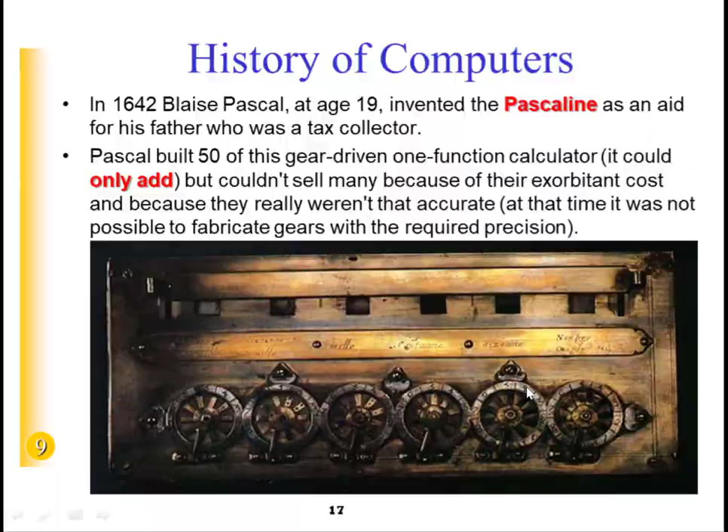Pascaline, or Pascal's calculator, was the world's first mechanical calculator, invented by French mathematician and philosopher Blaise Pascal in

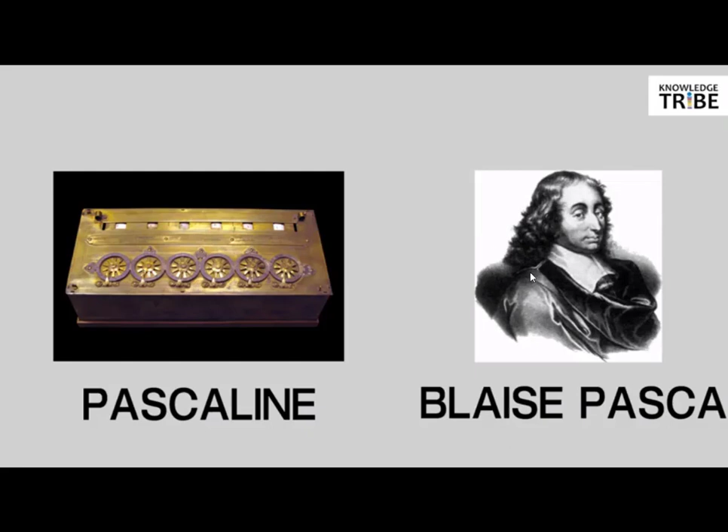1642. There are input dials and output windows on the top of the Pascaline. Inside each of the dials, we can see a small drum with digits 0 to 9 written on it.

Each drum has two rows of numbers, one below the other. Every time an addition takes place, the top row of the output windows is covered with a horizontal slat.

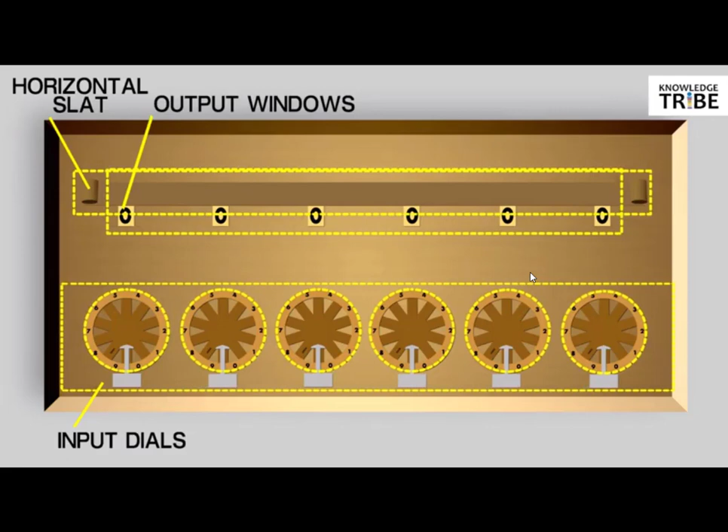Through the bottom windows, you can see the results of the addition. The top row shows you nines' complement numbers, which helps you in doing subtraction.

Each input dial is divided into 10 parts using spokes. In order to enter a digit you need, put a stylus into the middle of the appropriate spoke.

You need to rotate the spoke clockwise till it reaches the metal indicator or fixed stop located at the bottom of the dial.

Entering numbers consecutively in the dials displays their sum on the output windows. For example, if we want to add 38 plus 42, the first thing to do is enter the numbers 3

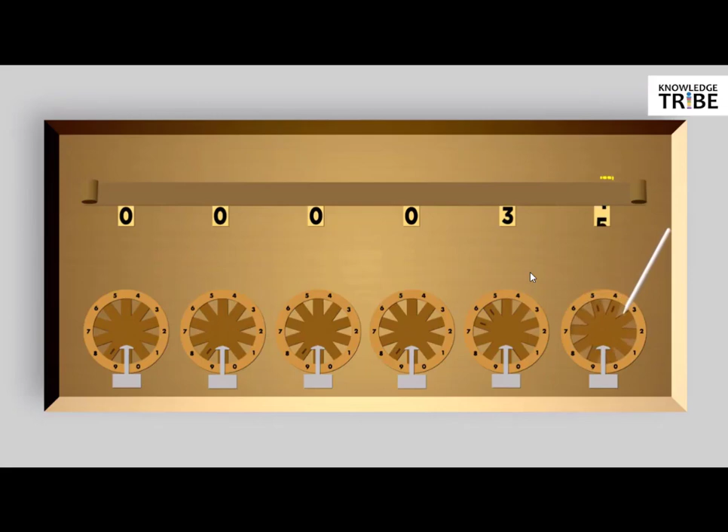and 8 in the rightmost dials respectively, like this. Basically, this is the row of ones and this is the row of tens.

I entered 3 in the tens place by putting the stylus in the appropriate place and rotating it clockwise until the fixed stop is reached.

That will show the value 3 in the output window in the tens place. The same procedure is followed to enter 8 in the ones place.

Put the stylus in the correct place and rotate the spoke until it shows 8 in the output window in the ones place. To add 42 with 38, you have to dial 42 using the same procedure.

In the tens place, we have 3. We need to add 4 to that. Move the spoke near 4 clockwise till it reaches the fixed stop.

That makes the value in the tens place 7. Now we need to add 2 in the ones place. For that, rotate the spoke near 2 till it reaches the fixed stop.

That will make the value in the ones place 0, and it automatically adds 1 to the 7 in the tens place, making the value in the tens place 8.

That happens because the value of 8 plus 2 is 10. The digit 0 stays in the ones place and carries the 1 to the tens place, making the value in the tens place 8, which is 7 plus 1.

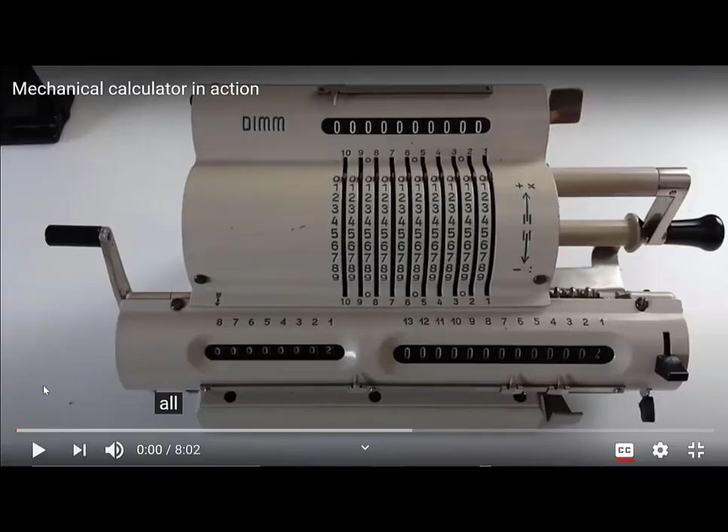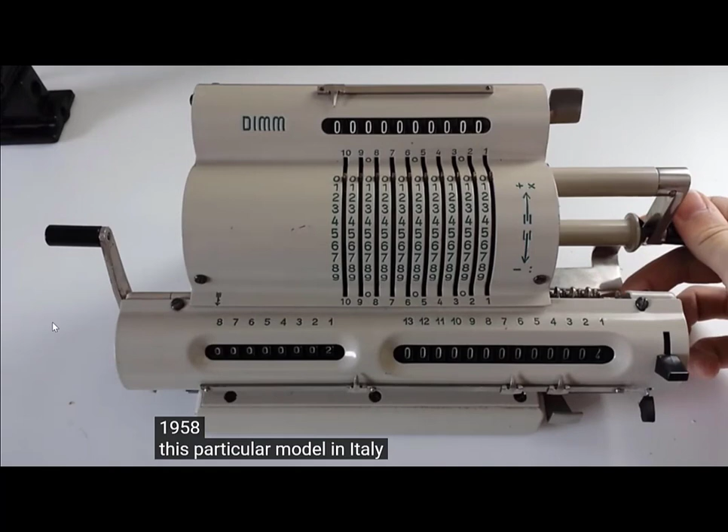Alright, so this is my pinwheel mechanical calculator that I recently purchased online. It was last produced in 1958, this particular model in Italy. And it's in fairly good condition considering it's at least 56 years old.

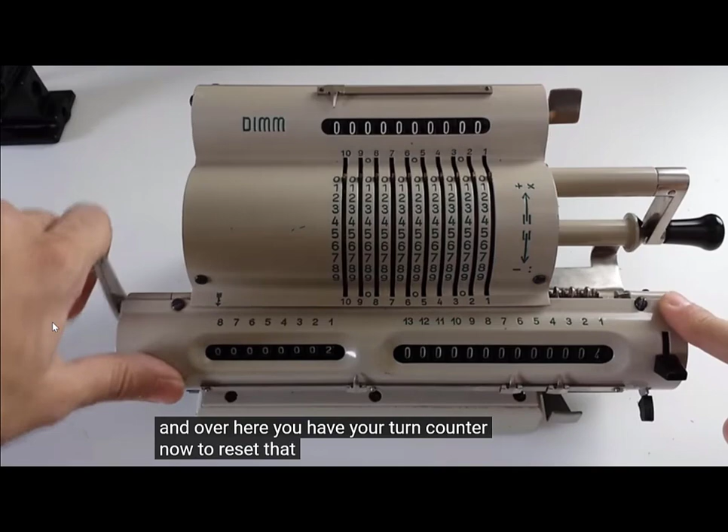Basically with mechanical calculators you have a few simple things for each model. It's going to have an input counter, which is this one here, and you input numbers by turning these dials, and you can clear that with this little lever here. Down here you have your output, and over here you have your turn counter. Now to reset that, pull this lever. It resets both of them.

Whenever you start using it, you're going to want to move the bottom display all the way to the left so that the first digit lines up with the first digit of the input. To do that, you would use this little rocker back here, or it has a little release button here that lets you slide it yourself. But in most cases, you're going to want to use this, unless you're just opening it up.

Now, how it works is pretty simple. You pull this lever out and rotate it clockwise to do addition and multiplication, and counterclockwise to do subtraction and division. As you notice, every time I turn it, the turn counter goes up by 1. So I'll keep doing that, and it just keeps going up. But the input is 0, the output is going to be 0, because 0 plus 0 is 0.

So I'm going to reset that, and let's do a basic addition. 2 times 1 is 2, and 2 times 2 is 4. So basically what I did was 2 plus 2 equals 4, but at the same time it's multiplication because I'm using the same number over and over.

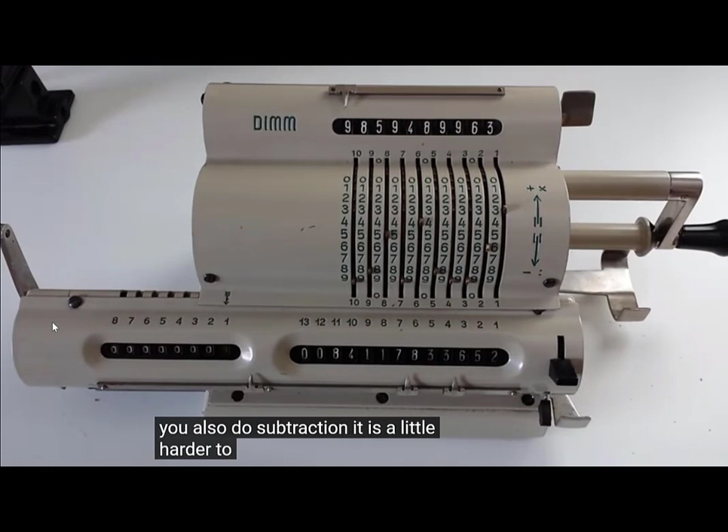So just do a few more additions. You could also do subtraction. It is a little harder to pull the lever when you do have a lot of numbers, but it's not too difficult.

Alright, so I'm going to reset everything there. Oh, and another thing, this switch is basically a... not sure what to call it. It prevents the output from being erased when you do a clear. And you really only use that in division.

To show you an example of division, I'm going to do a big number just to show what it can do. So I want to divide this number, 3,164. I'm going to move it down there, and I want to divide that by 13. So I'm not going to do anything yet.

I need to clear the turn counter, because in division, the turn counter is your output or your answer. So I'm going to lock the output and reset the turn counter. Now the turn counter is all zeros, and I'm dividing 3,164 by 13.

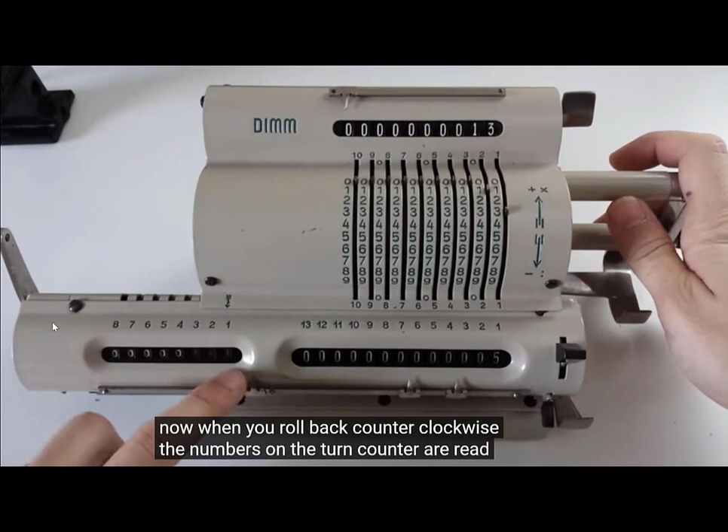So now we get our answer over here. Now when you roll back counterclockwise, the numbers on the turn counter are read. I'm going to move it so you can see a little better. Yeah, there they are. 243 is our answer. Now, that's not right because there is a remainder, and that is displayed on this counter here. So it's 243 with a remainder of 5.

And those are the basic operations of the calculator, and that's pretty much all there is to it. It could do the same operations you would do on a basic calculator. So that's it, and thanks for watching.

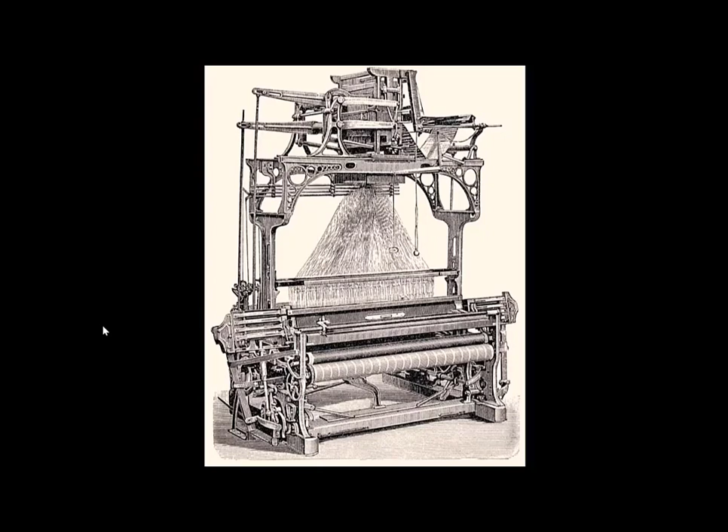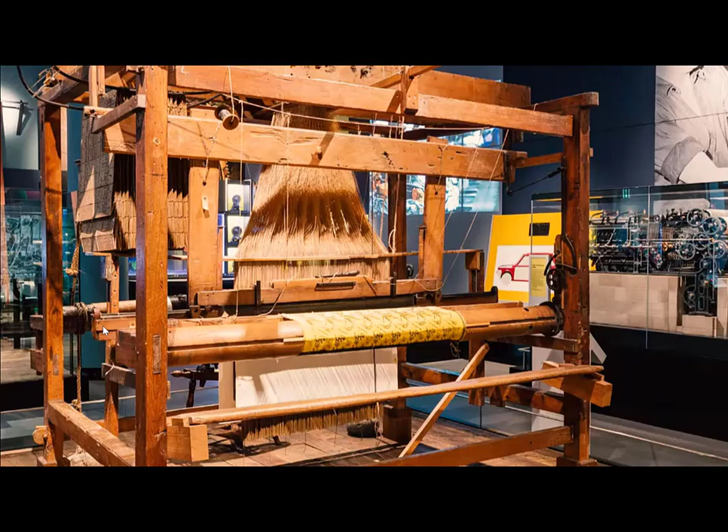Today we are featuring 200 years old Jacquard Loom technology invented by Joseph Marie Jacquard, which uses the punch card technique to design the fabric. It was later adopted by a computer system. You can call Jacquard the forefather of a modern-day computer.

First, the fabric design is translated to graph paper. Then the design is transferred to the punch card by a skilled craftsman. Each punch card represents one row of pattern, and a series of punch cards are assembled to complete the design. Then this chain of punch cards is attached to the Jacquard machine.

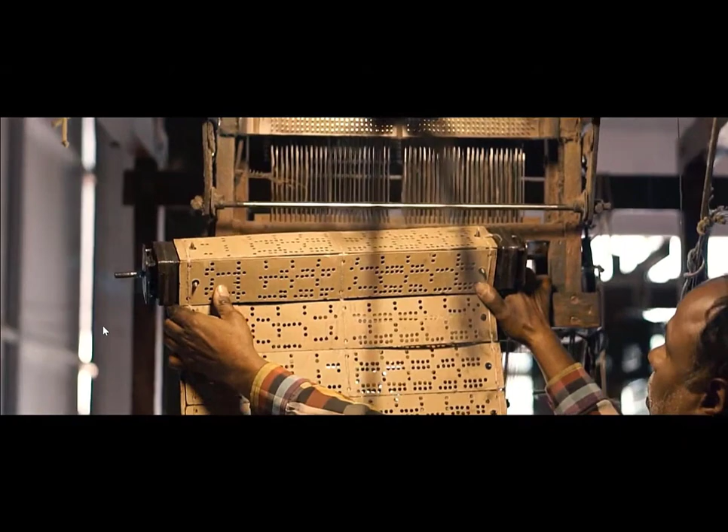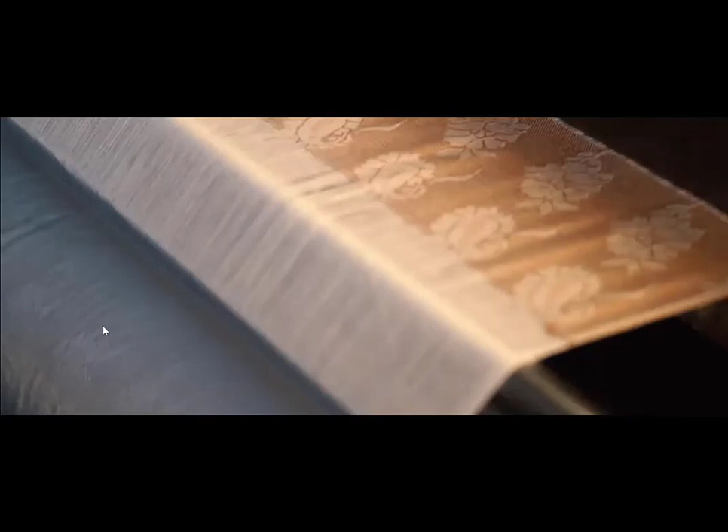The holes in the card select threads per pattern and allow the hooks to pass. Lastly, the fabric is created by passing threads over and under using the shuttle.

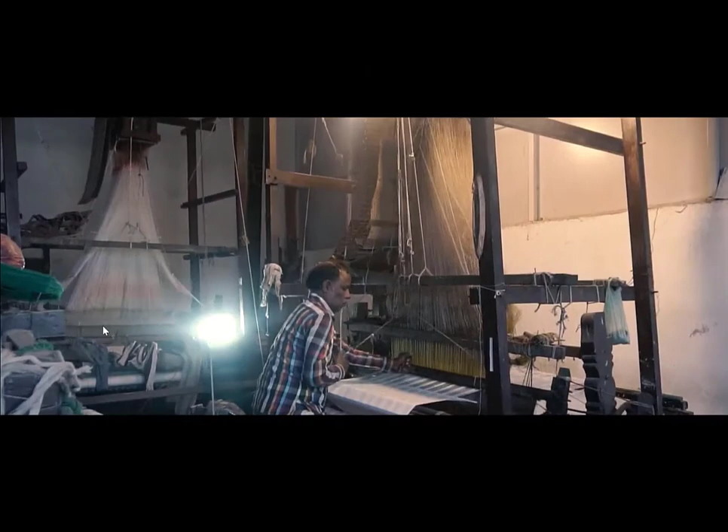These are some of the patterns created here at Pascaline Studio. Since we are working with probably the last generation of Jacquard craftsmen in Nepal, here at Pascaline Studio we are keeping the authenticity of Jacquard tradition alive.